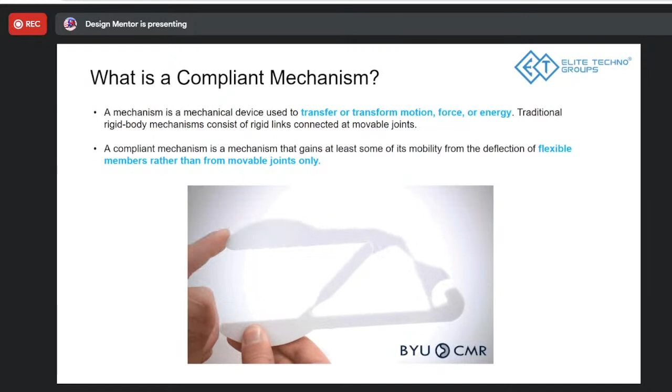So moving forward, let's look at some daily life applications of compliant mechanisms that are all around us that we use and don't realize. Okay, these are compliant mechanisms.

So the first one, you can see this is like a paper clip, or a clip to hold some kind of paper or something else. This is metal, using a wire, and it's a very simple mechanism to hold something. Other than that, you might have also seen the same kind of clip made from just wire, no kind of metal part used. We used to have this to hook up clothes for drying. So that is a good example, a daily life application of compliant mechanisms.

And your bendable straws, right? So those have some kind of architecture where you're able to bend them, or you can contract or expand them. So that is also a compliant mechanism. It's made from just one part, and it's flexible in a way.

Then the third one here is by BYU, a company that has done lots of research into compliant mechanisms. After this boot camp, you can go and actually check out the page, and it's very insightful if you go there. So here also they've given a switch made of just one part. You can 3D print this switch exactly, and it might not look like a normal switch right now, but with some alterations you could get the dimensions correct and use it as an actual switch in your home, right?

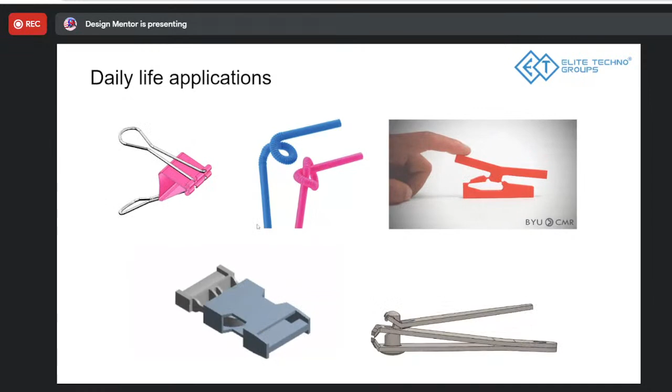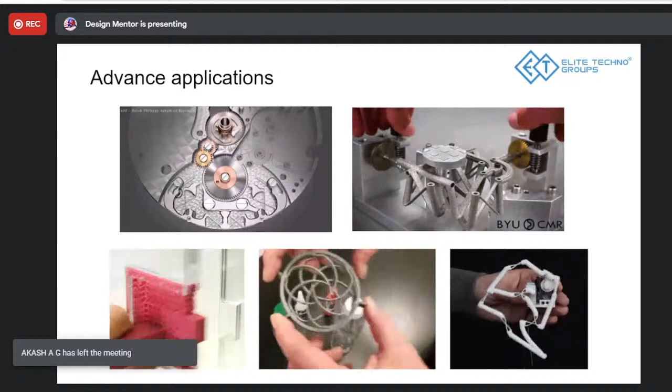Okay, so we'll come to some advanced mechanisms now. First one, as you can see, this is like a wristwatch, and a kind of very flexible thin metal mechanism is being used to rotate the gray colored gear in between. According to the time input, it's moving the gear slowly. So for small parts, you can use this compliant mechanism. You can actually 3D print these kinds of small things, which are really difficult if you try to do it with subtractive manufacturing.

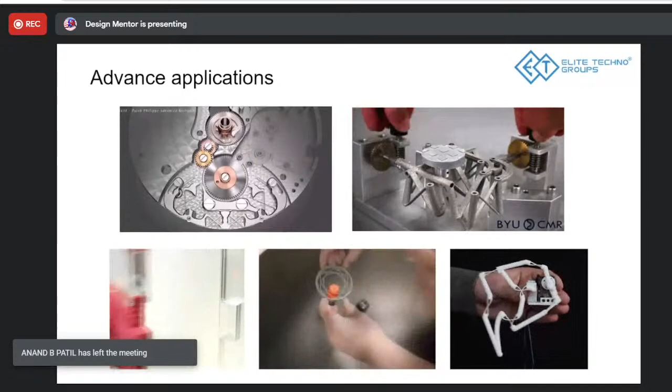So anyone here could tell me what is the difference between subtractive and additive manufacturing? Guys, come on, I need you to be more active here. Subtractive manufacturing means machining, and additive manufacturing means welding, means adding material to it.

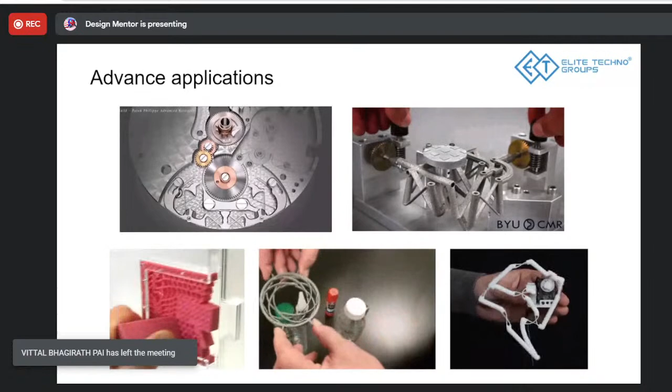Yeah, good answer. Subtractive manufacturing means you're taking some kind of material, chopping it down, and removing part of the material, and then you get the final product. That's a very long and costly procedure sometimes when you're trying to get this kind of accuracy for such small components. So there you can use additive manufacturing, where the smaller the component, the easier it becomes. You just need a little bit of precision in that machine. So this is where additive manufacturing really shines.

And the geniuses who use this technology and came up with this are also trying to implement the same kind of mechanism at a microscopic level. If you can imagine how difficult it would be to actually make microscopic mechanisms like this, but somehow they're doing it, and it's really wonderful, and you're left curious how exactly to do that.

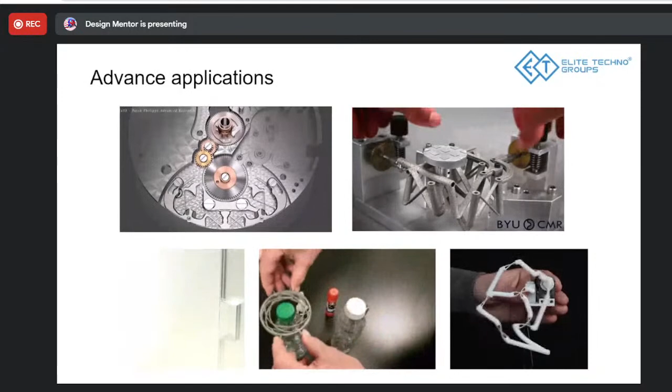Then the second one here, if you see, this guy is moving these two rotors, two gear mechanisms, and the part in between is rotating. That whole thing is made out of titanium - I just want you to imagine it - one of the toughest and strongest metals found on Earth, and somehow with just a little force of the finger, he's able to twist it. So that is also a great example of a compliant mechanism.

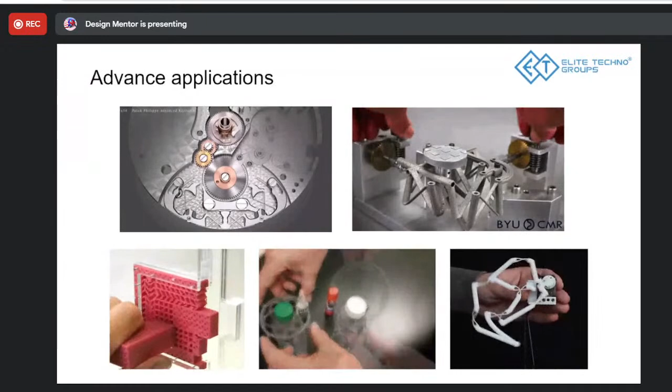And can anyone guess where this is used exactly? Just a guess, anyone? Come on, just guess where this is used. I want you guys to tell me where do you think this kind of mechanism is being used. What is the real life application of this kind of mechanism? Which sector do you think? I'm not able to understand the mechanism.

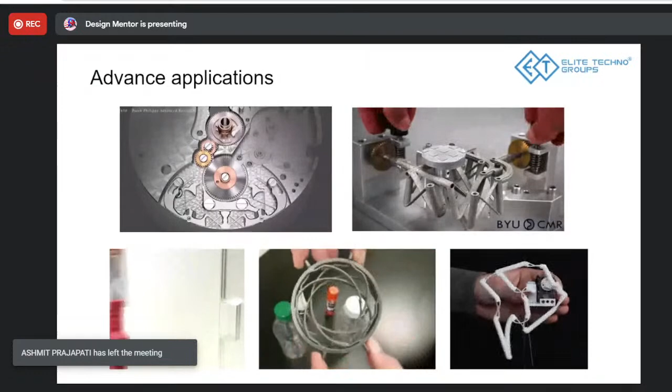Okay, do you want me to repeat the question? See, what is happening is there are these two gear kind of mechanisms, on your left and on your right. So whenever the person gives some input, clockwise or counterclockwise, the mechanism in between - the center circular plate you're seeing - is tilting in some way, here or there. So that tilting mechanism is being used somewhere actually in real life.

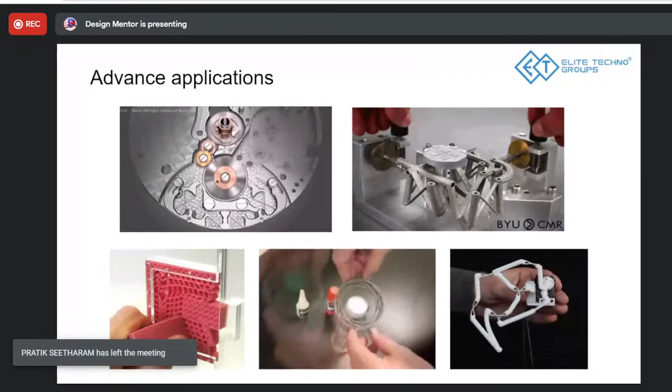And here the material that is bending is titanium. If you've ever had a chance to handle titanium, it's very strong and you can't really bend it like that. But somehow they have designed it in a way that it bends. Yeah, and this is all 3D printed also.

Okay, so just what do you think - where is this mechanism actually being used in real life? Which kind of sector? Automotive sector, shipbuilding, or somewhere else, biomedical?

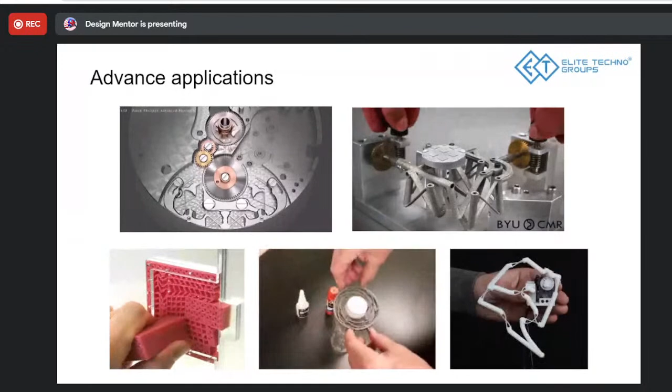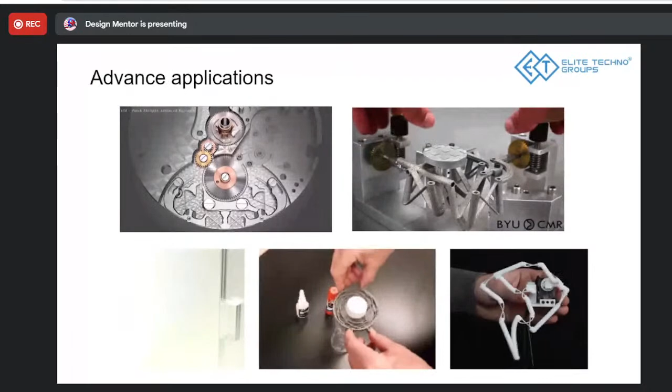Okay, automobile. Someone said automobile. Anyone else? Come on, just guess it. You don't have to be correct.

Okay, no issues. So this is used in watches, okay. No, the first one was being used in watches. This is not used in watches. Good answer though, good attempt.

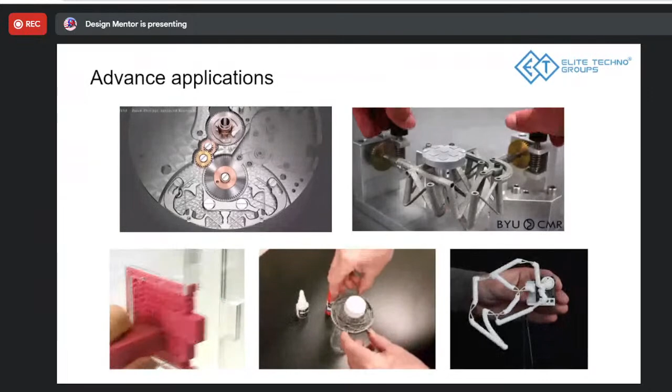I'm glad that some of you are actually thinking and putting thoughts into it. So this is actually used in satellites. The mechanism that you see is used to rotate or angle the boosters of the satellite, to give it certain direction.

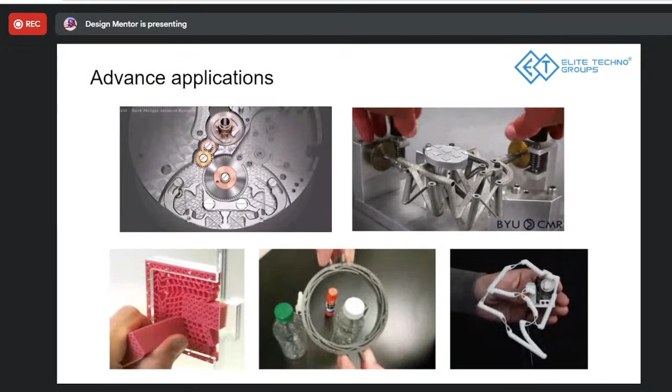So what used to happen at NASA was that satellites needed two boosters to direct themselves on a particular trajectory. Now, because of this simple mechanism, first advantage was, since it was 3D printed, it was very light, and that is what you need in a satellite. It should be very light.

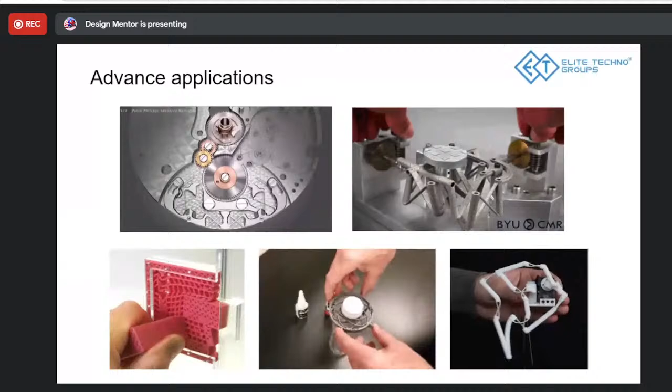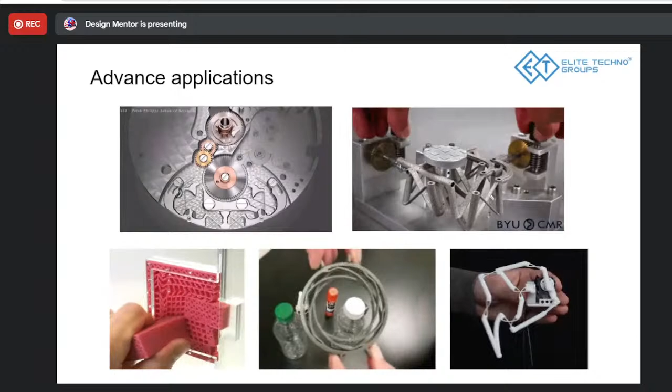Second, it's very easy. You just have to attach two motors there, and you'll be able to give direction to the booster. Not a very complex thing to design where lots of moving mechanisms are required, and lots of parts are also not required. So because of that, from two boosters, only one booster is now required for those satellites.

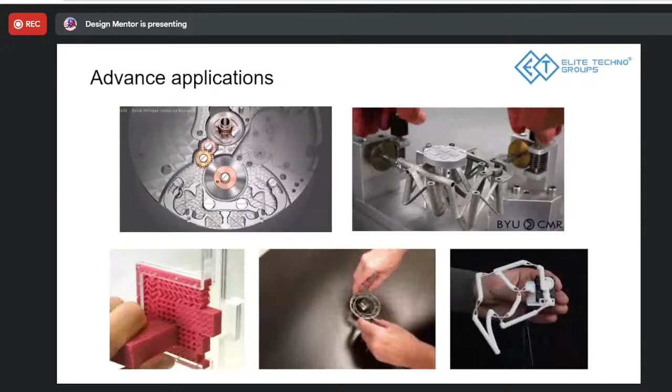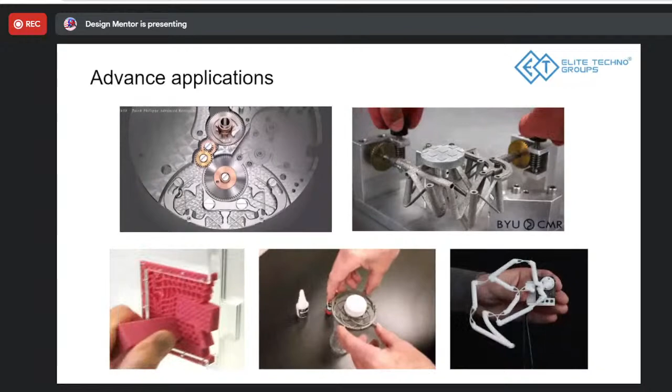And this is the kind of thing that compliant mechanisms are able to achieve, right? So that is also a big thing. You're cutting the cost down from two boosters to one booster. That's lots of money you're saving for your organization. So that's a big thing, right?

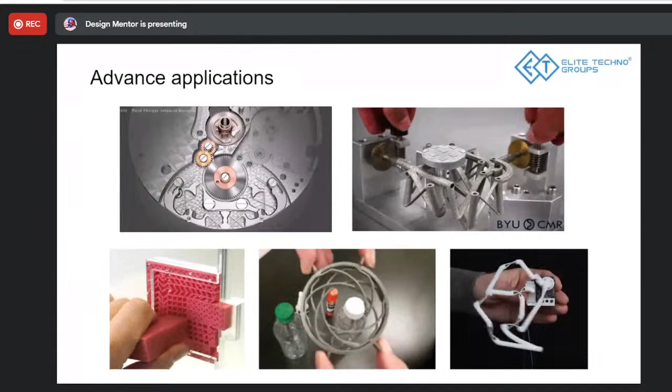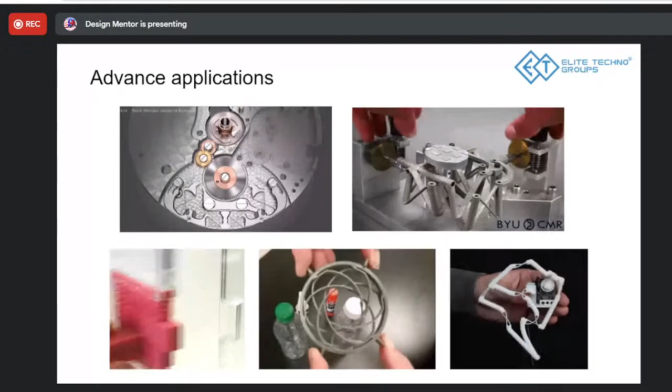Then moving on to the next one, you can see they're using it as a door hatch. If you look closely, it's not thermocol or rubber-like material, it's actually very solid plastic. It's very hard plastic, and still it moves in a way you feel like it's kind of a thermocol or rubbery type of material.

So in such a way we could use a hard plastic material and bend it for some kind of application. Then there's also this one, a kind of gripper for cylindrical surfaces. Any shape of cylindrical surface you can lift with it, even a squarish surface you can lift with it.

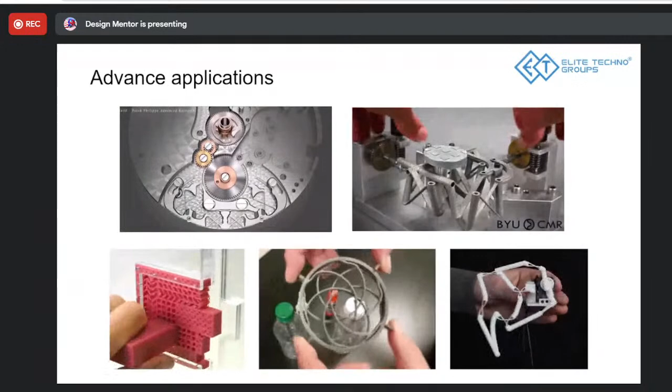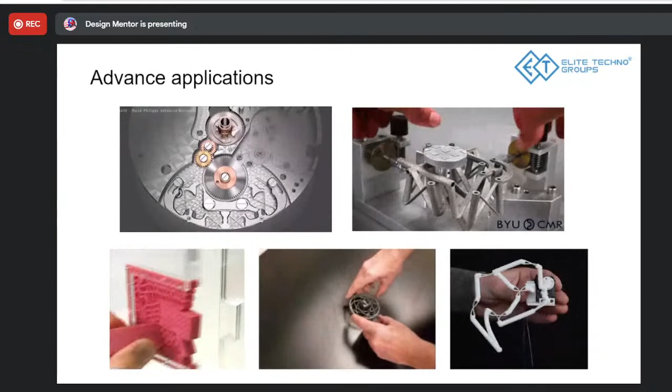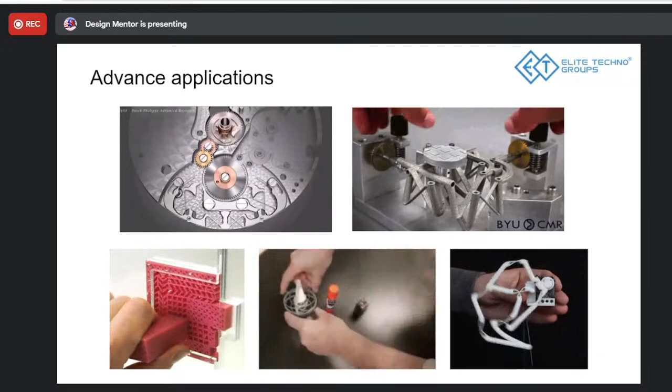Then the last one is trying to imitate a natural, very natural, like a cat or a dog's feet movement. This is also a very good mechanism if you're going into research on flexible joints and trying to replicate nature.

So let's look at some more examples, because we can't just stop at that. We need to go further and look at exactly how they're being implemented. So let's look at a field, robotics, and how compliant mechanisms are changing that field.

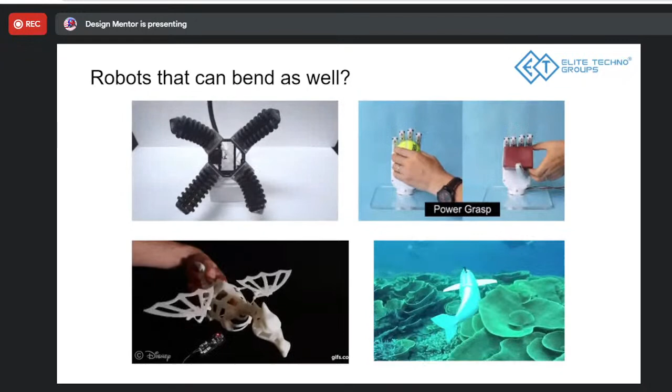Then also the bird animation - this is actually used by Disney as a reference to take from nature, since they wanted to animate a bird and fully see how it actually works. So they tried to get a mechanism into it, and then they modeled the 3D graphical bird around this mechanism, so it could imitate the natural movements of an actual bird.

And because of it, a lot of Disney's movement, if you see those films, looks very natural, right? It's not fidgety and choppy, it's very natural movement. So they actually invest in research of all these things. They're not just sitting there and animating.

They're actually researching into all of this, so it's a great thing. A company like Disney is into technology, right? The last one just blows my mind, how they're able to take a kind of plastic and bend it like it's some kind of cloth or rubber. This was made using design techniques incorporating 3D printing as well. You could have lots of fun with this and do lots of research applications for this. Overall, I hope you understand the amazing things you can achieve with compliant mechanisms.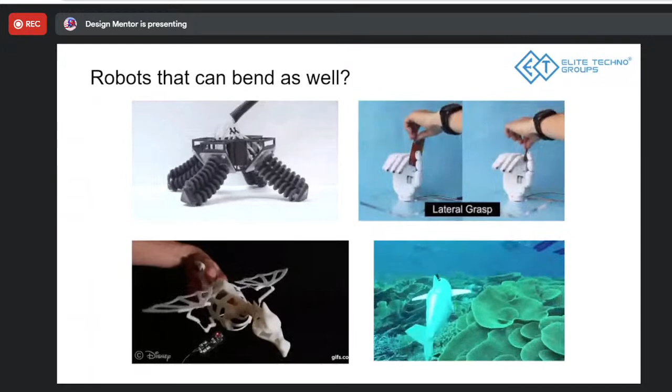Okay, so any doubts in this so far? Any kind of mechanism you didn't understand? Okay, so no doubts, cool.

Then now let's look at advantages of compliant mechanisms over simple normal mechanisms. I've just mentioned three of them here, but there are multiple advantages for this. The first one is price of production.

We'll take the example of this same gripper. Why is this mechanism cheaper than the wire cutter or gripper tool? You're cutting down the requirement of all these different parts that need to be manufactured separately, and then you have to put someone to assemble it. So lots of money goes there, and although all those other parts might be made from subtractive manufacturing, here you could just have a 3D printer that goes on printing layer by layer.

You have lots of parts just simply, and that is also a point - ease of manufacturing. Very simple to manufacture this component, because most of them just have one part. They can be made from just one part. You don't even have to look for assembly - just 3D print it, and that's it. It's ready to go, ready to work. So inexpensive and ease of manufacturing, very good things, great advantages.

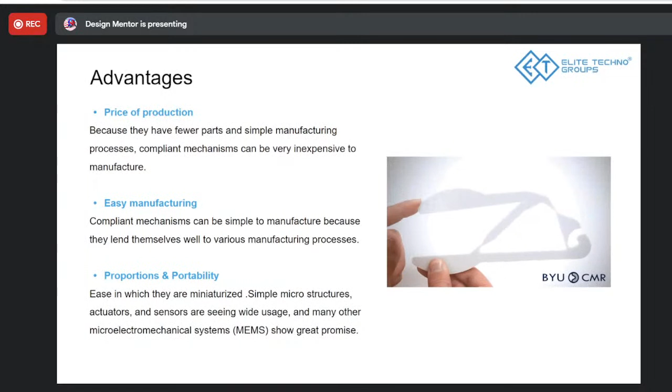Okay, then we'll move forward. So those were some great points, and that is leading to materials, which we'll get on further in the presentation. Let's look at how you could actually design one. Now, designing one is not that easy, and it requires lots of years of research, but this is a simple case study for you to understand the process that goes behind designing one.

So let's say I have to perform a task where the arm or the mechanism has to go in this kind of shape, a half oval kind of shape. For that, I'll devise a mechanism with joints, right? A kind of joint that follows a certain kind of trajectory. That is the output that I require.

Now with joints, this is the normal mechanism. There's lots of complications, and now we have to turn it into a compliant mechanism. So first, motion tracking is done. What is your exact output that you need, that you have done? You've made a mechanism with joints and other things.

Now the second part is collision avoidance. So you'll see exactly where the issues could be, over all these cycles. Let's say your mechanism is going to run for like 10,000 cycles—there might be things that could collide with each other. Joints and members could not function properly, and you could have certain wrong scenarios, like the one given in the red line—it could go somewhere that is not the required output.

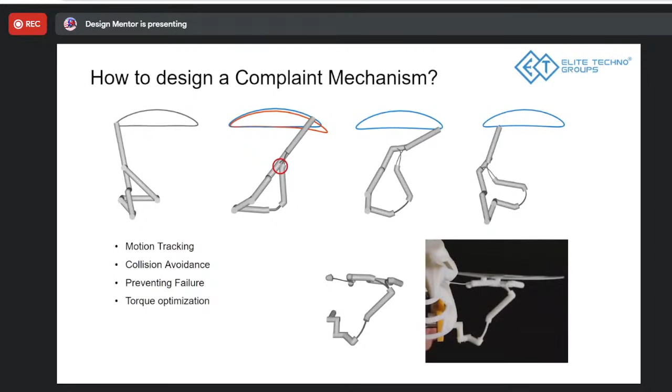Then let's look at 3D printing this mechanism. Let's say we have designed a kind of mechanism, and now you have to 3D print it. First you look at materials—according to your needs, what materials you're selecting. In plastics, we have given some 4 materials, and we'll also look at some metals that are used. In plastic, there is PLA, which is one of the most used, along with ABS material.

Two of the most used materials when it comes to 3D printing are both plastics: PLA and ABS. PLA is a little eco-friendly, whereas ABS is a little toxic, so you have to have a controlled environment for it. But both of these materials are good, and they are used mainly for DIY projects. The normal 3D printer, the FDM kind, uses both these materials.

Then there is something called PVA. Very fancy names, but we just use the short forms to keep it simple. PVA is a dissolvable kind of plastic, used for support material. Sometimes you have to make a very complex part that is like floating in the air, but 3D printers can't print in the air, so you have to provide some kind of support structure. Once the 3D printing is done, we don't need those structures anymore, so they can be removed or dissolved. This plastic is dissolvable with water or some other solution, and once dissolved, we have the final finished product.

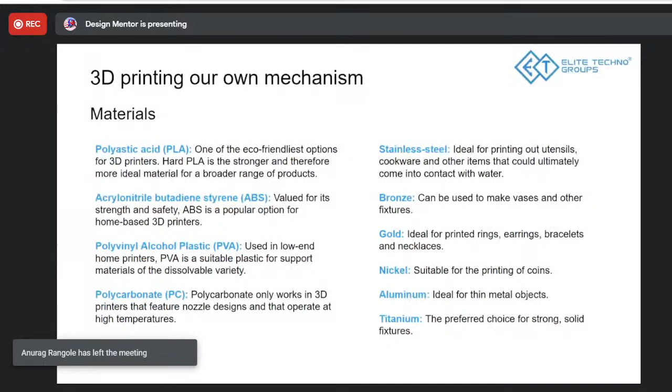Then there are also metals — stainless steel, bronze, gold, nickel, aluminum, titanium. All these metals are also available for 3D printing. Sometimes these materials are mixed with plastic to create a polymer kind of mixture that is used directly. That becomes cheaper but still has lots of the good properties of that metal. Otherwise, the pure metal material is also used directly. You could research further into all kinds of materials — there are lots of kinds, and lots of in-betweens, and according to your application you could choose them.

Then about 3D printers. Once you've designed your compliant mechanism and selected a material through research, you also select a kind of 3D printer through research. We have four main kinds of 3D printing technologies. There are more, but these are the more prominent ones, and you might have heard about this, or seen it without knowing the name.

The first one is FDM, fused deposition modeling. This is a very DIY print kind of 3D printer — you'll find it at lots of places. It used to be costly but is now very cheap; you can buy one for the price of, I think, cheaper than an Xbox, and start making your own 3D printed projects. It's very fascinating — if you step into the world of 3D printing and manufacturing, it's very easy. You'll just require about one week of learning, and you'll be good at it, and then you can make lots of fun projects with it. In fused deposition modeling, you have a filament that is melted and goes through a nozzle, and layer by layer it prints the model. Then you can remove it and do whatever you want with it. This is a very simple way to 3D print.

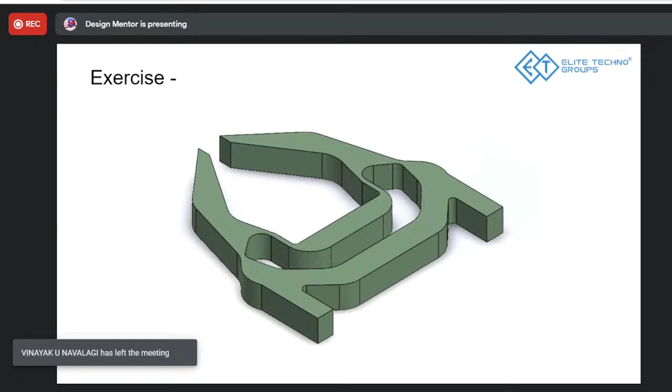Before ending it, we talked about the pen mechanism, and this is just an example of how somebody changed the pen mechanism into a compliant mechanism. I just wonder, if these things even we can think of and make it such a simple mechanism. It doesn't look very stylish, but it's certainly good enough to do the job. And all these compliant mechanisms, most of them are taken from a website called Thingiverse.